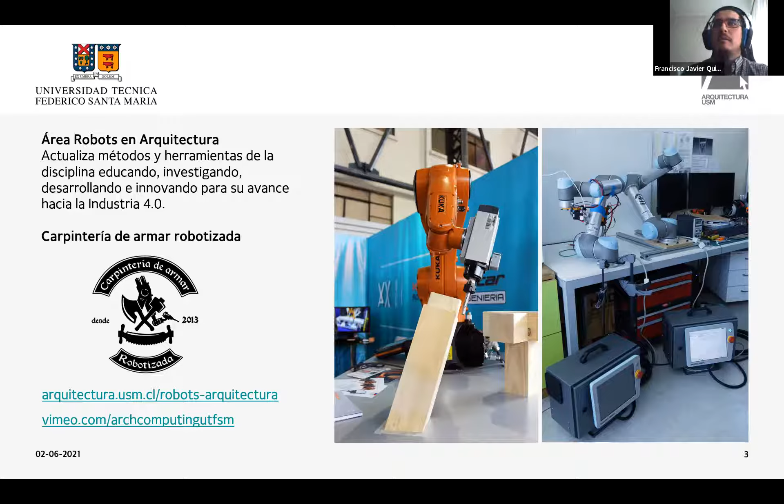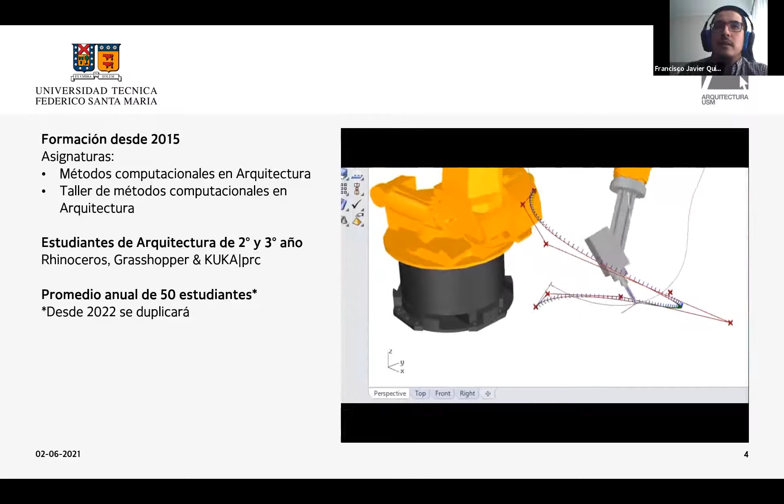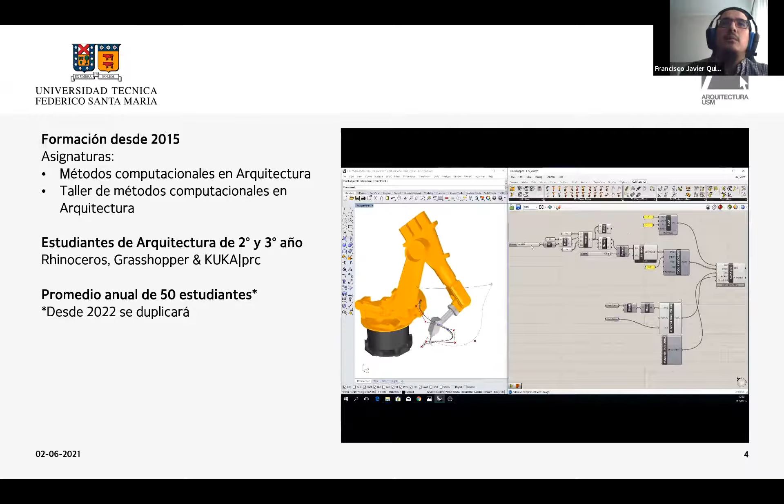Desde el año 2015 estamos formando arquitectos en estudiantes de arquitectura de segundo y tercer año, aplicando conocimientos de Rhinoceros, este modelador tridimensional muy popular en las carreras de diseño y arquitectura, implementando también la programación visual en Grasshopper, este ambiente de programación inserto dentro del modelador 3D.

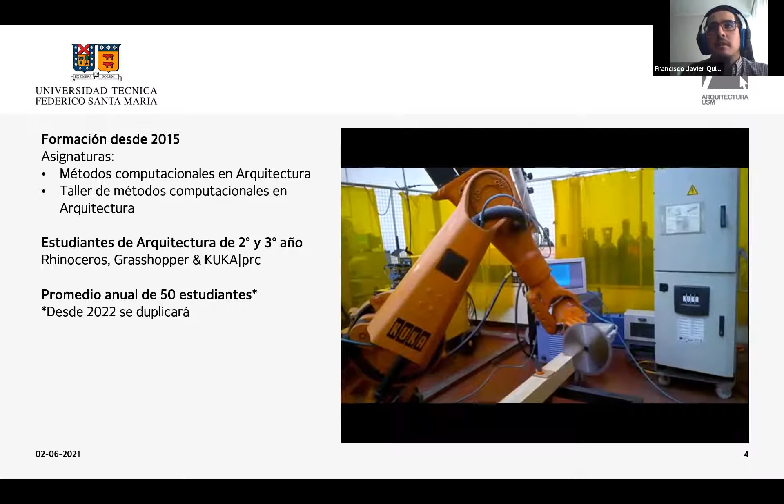Además trabajamos con el control paramétrico de robots KUKA con KUKA PRC, dando el crédito a Johannes Braumann, el arquitecto austriaco, desarrollador líder de esta aplicación, que permite controlar un robot manipulador desde este entorno gráfico.

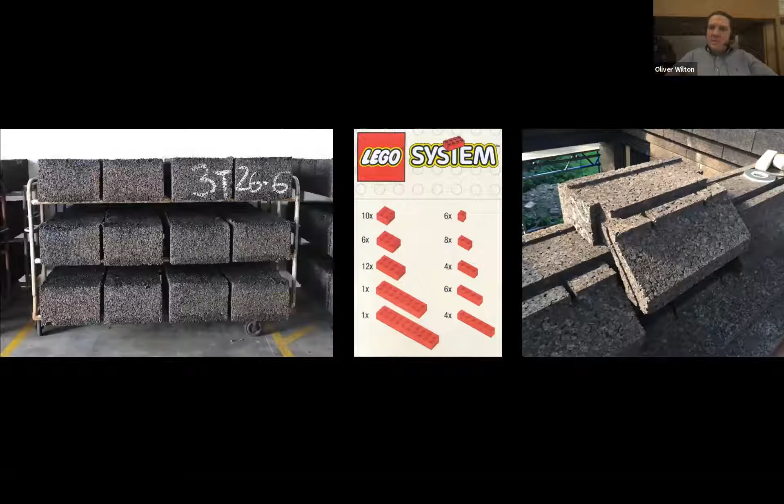So the aims for this specific work was to develop a robotic milling method that could shape cork billets, which you can see on the left, into the cork building blocks you can see on the right. And the idea was that this could contribute to the development of the cork construction kit, which is a relatively simple new form of construction, a bit like giant plant-based Lego. This was developed with a number of partners who were mentioned later under a broader research project and was then applied in Cork House.

Here's the context for this, which is very relevant here. So cork's the outer bark of the cork oak tree, stripped around once a decade in a process that doesn't harm the tree. And using cork helps to support these quite biodiverse agroforestry traditions that you find around the Mediterranean basin.

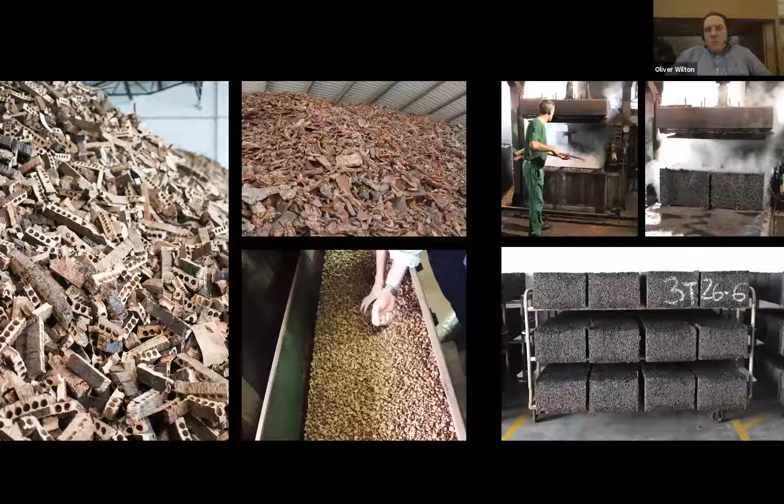The material we used in this project is pure expanded cork agglomerate. It's supplied by project partner Amorim. And here, waste cork from forestry and other industries is granulated and then steam cooked in autoclaves, which you can see happening on the slide. The cork expands, and the natural resin in the cork, called suberin, melts and then rebonds to form blocks of pure cork with no added ingredients. And that's what really attracted us to this, a kind of industrial plant-based product without petrochemical binders.

It was invented in 1891. It's not a new material. And it's been extensively used in construction for over 100 years, ranging from insulation, as you can see on the left here, in a Spanish slaughterhouse, to self-supporting partitions in the center in a large American cold store, to the first use as external cladding by architects Siza and Souto de Moura 20 years ago at the Hanover Expo.

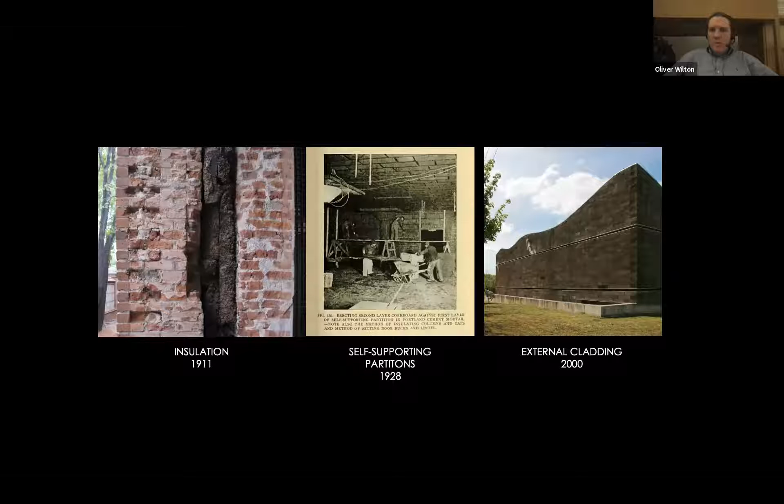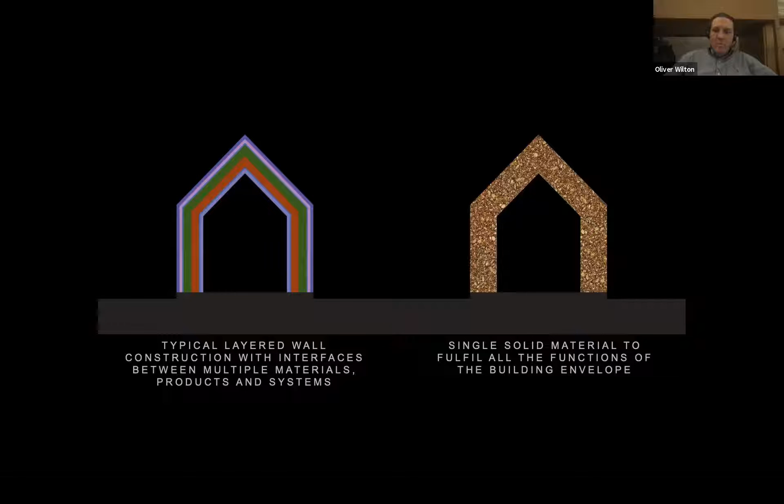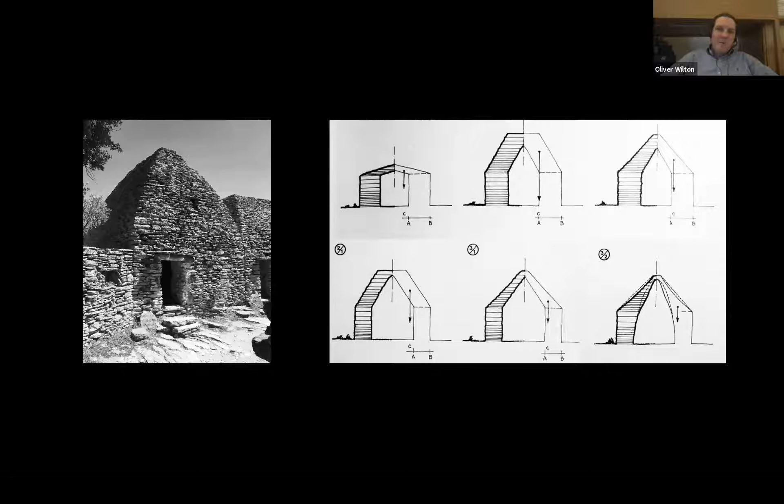And to complement the material simplicity, we intended to use a simple building technique. Our initial point of reference was historic forms of dry stone construction, such as this French borie, which are built by simply placing one block on top of another. And they come with associated typologies that reflect their character as simple compression structures, using walls and corbelled roofs to give enclosure. So we got started.

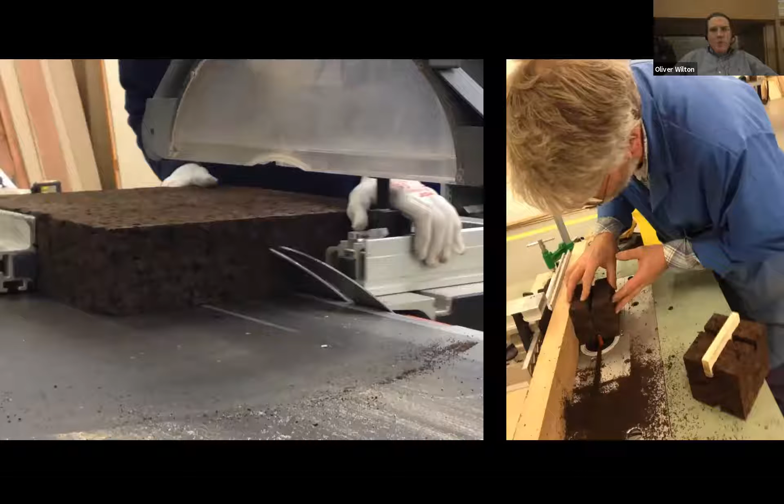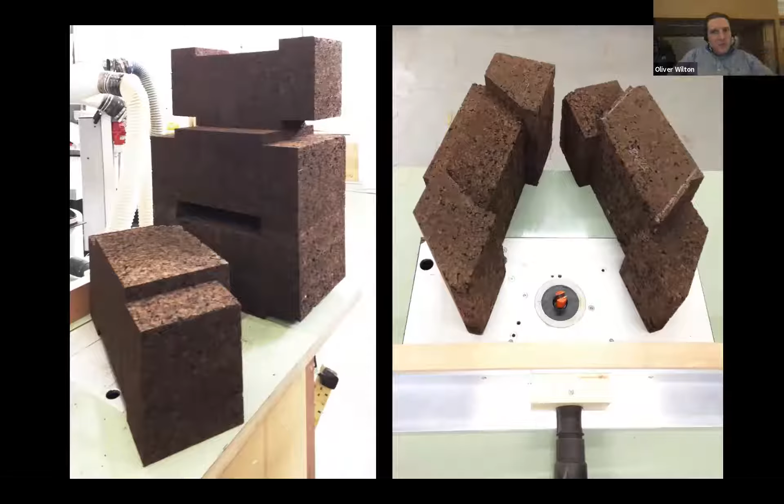Initial prototypes were fabricated using traditional machine tools. And we soon moved on to focusing on pure cork structures using tongue and groove geometries, you can see here, to give a simple interlocking fit that requires no glue or mortar. Soon we discovered that while there's a simplicity in asking one material to perform all the functions of a building envelope, the shape of the blocks themselves can become rather complicated, especially in the corbelled roof, which you can see on the right here. And this is because of what we were asking the blocks to do.

So as well as providing structure and needing an interlock for that, we also wanted them to keep the rain out and provide air tightness along with thermal insulation. Now, at this point, analog fabrication was proving to be quite challenging due to the time taken to shape each block. And it was also difficult to achieve sufficiently low tolerances in order to give a snug block-to-block interference fit.

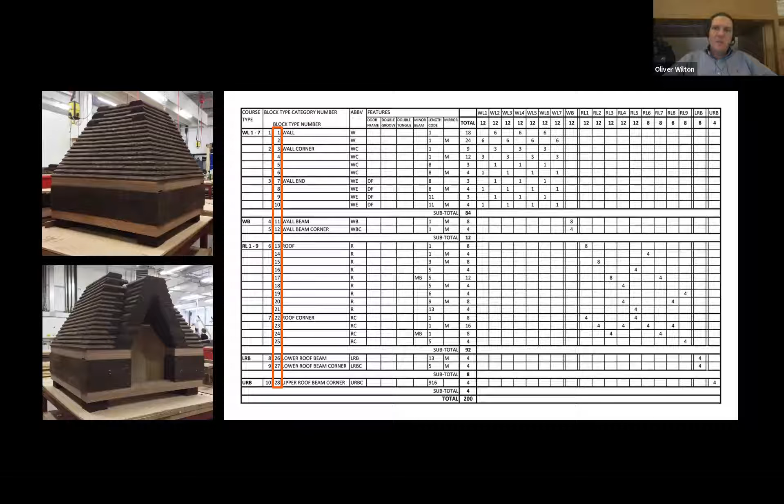And the simple prototype cabin that we intended to build had around 200 blocks, and that included 10 unique types of varying length, giving 28 different block geometries in total. So we started to consider using robotic milling with the aim of being able to fabricate blocks sufficiently accurately and relatively quickly. And we were lucky to be based at the Bartlett with colleagues from B-made and people like Mike Arnott around who knew what they were doing on this.

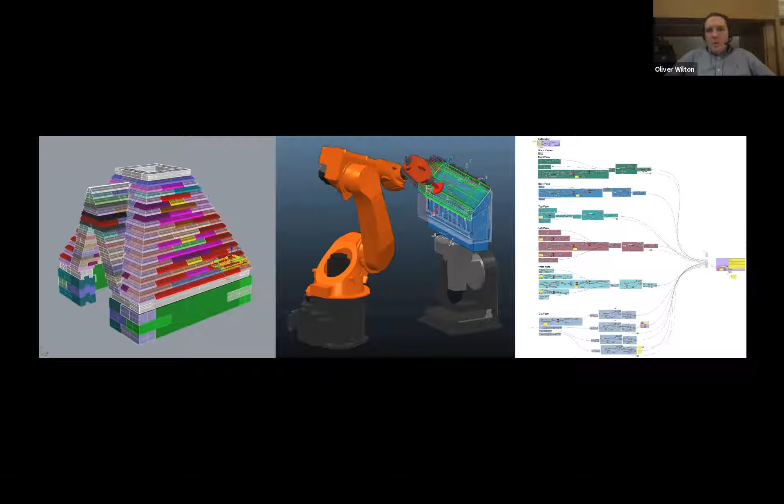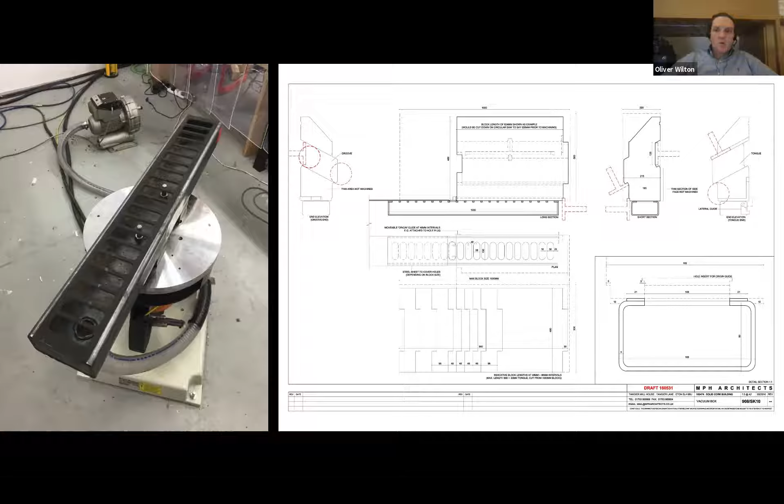Now we determined to use a single 125 by 40 millimeter high volume cutter because we didn't have access to a tool auto changer. We wanted it to be a quick and efficient process. So to enable this, we adjusted the block geometry, which you can see on the right here, so that the face was used for high volume cutting, and then the edge was used for putting in slots, which gave performance relating to rainwater drainage and air pressure equalization.

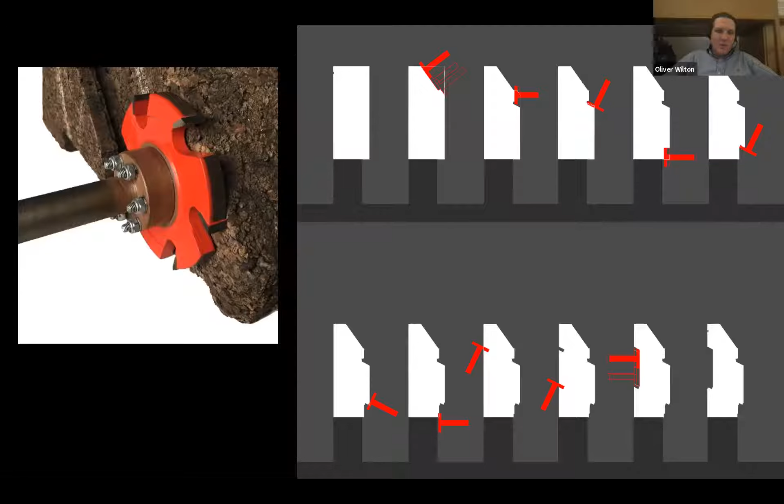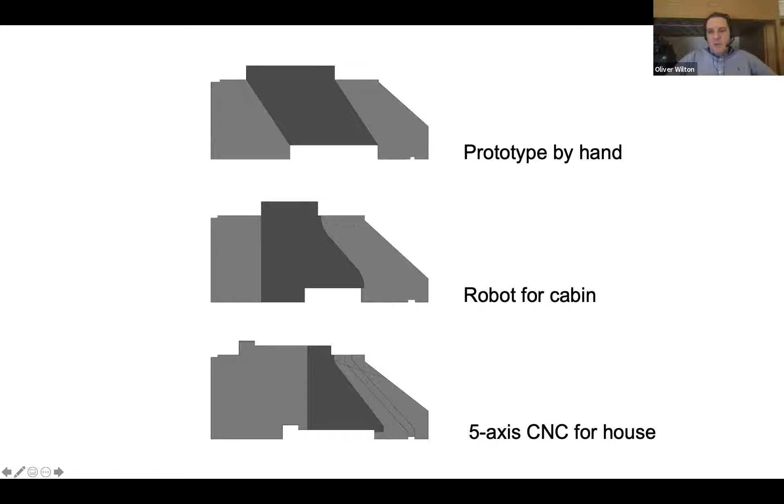So you can see how the profile for the roof block evolved. So the top were the initial by hand versions. The one in the middle is the robot milled block used for the cabin, and the one at the bottom is a slightly more elaborate geometry that we ended up using for the house after we learned some lessons along the way. And so here's after a lot of work, mostly by Matthew and Mike Arnott, this is a robot cutting a roof block.

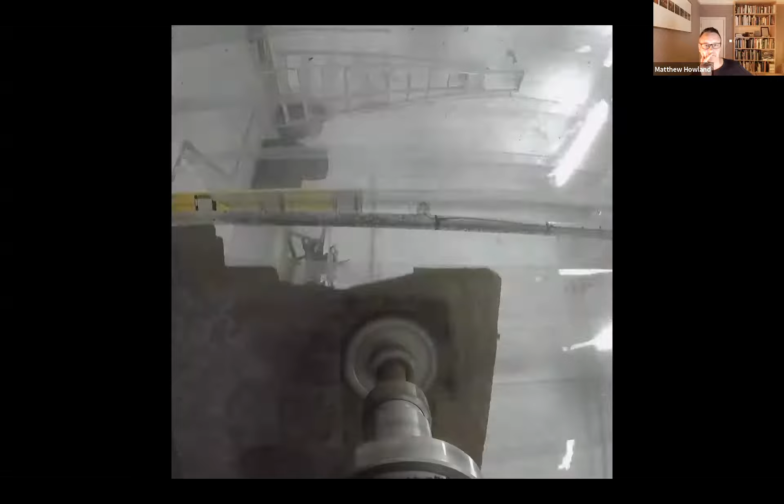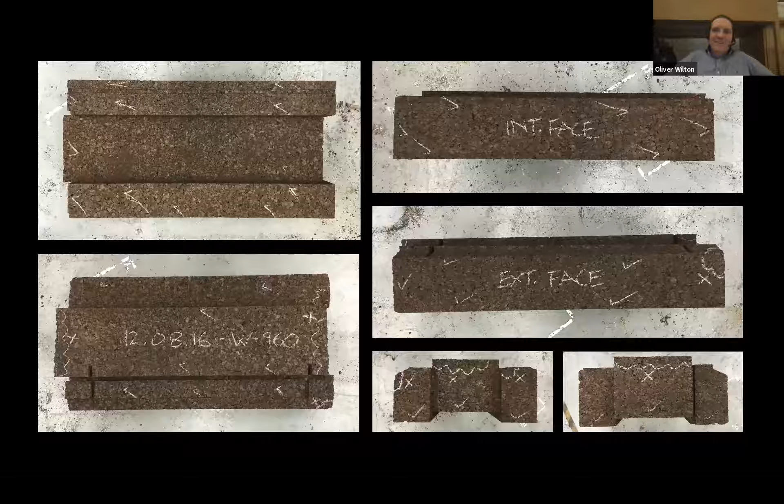So when that was working well, that would take around 15 minutes or 20 minutes per block to cut. And there was quite a bit of work on robot calibration and adjusting the cutter speeds before we started getting blocks of sufficient tolerance. And again, that was work that Mike Arnott was heavily involved in with Matthew. They really bore the brunt of that work. It wasn't quite as simple as we'd initially hoped it would be, but it did work very well in the end after quite a long time.

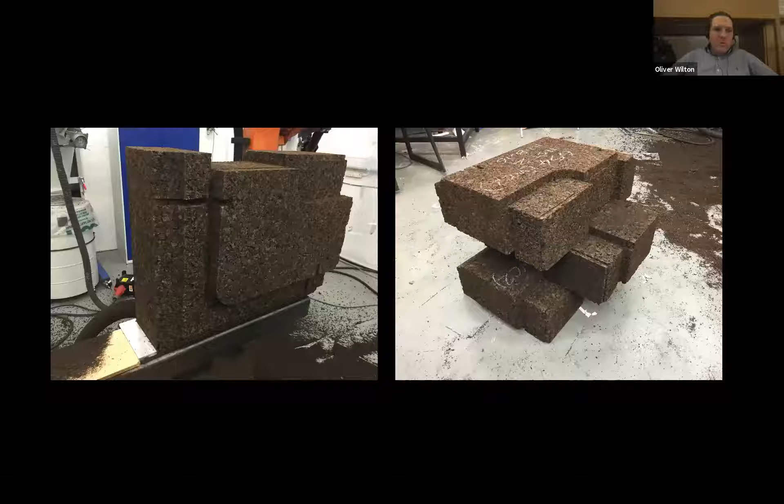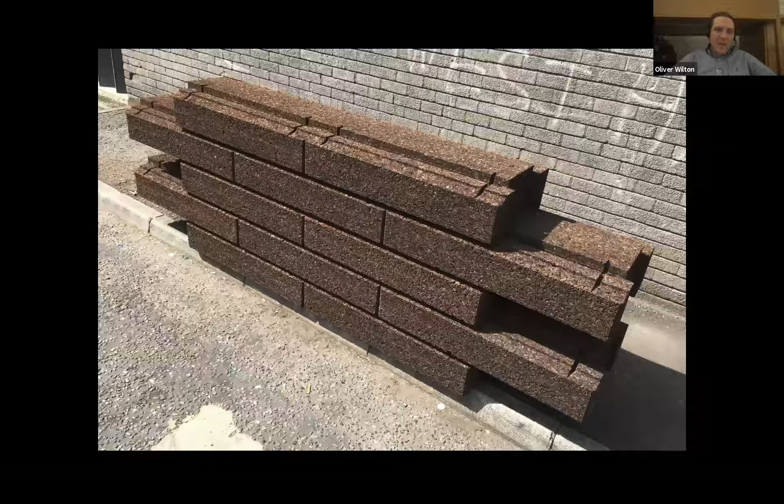So here you can see some wall corner blocks, a block on the left on the cutting vacuum bed, and on the right assembled. And here you can see the first section of wall that we assembled at the Bartlett, and that was an exciting moment because it was at that point that we realized that we could actually proceed with this method and it might actually work.

So anyway, something we discovered, and particularly Matthew discovered, was that it wasn't such a clean process as we'd initially assumed. So we thought, cork, robotic milling, it'll all be beautifully accurate and clean, but it wasn't quite like that. For some blocks, around 20% of their volume was cut away during milling, and this gave an awful lot of cork dust and granules.

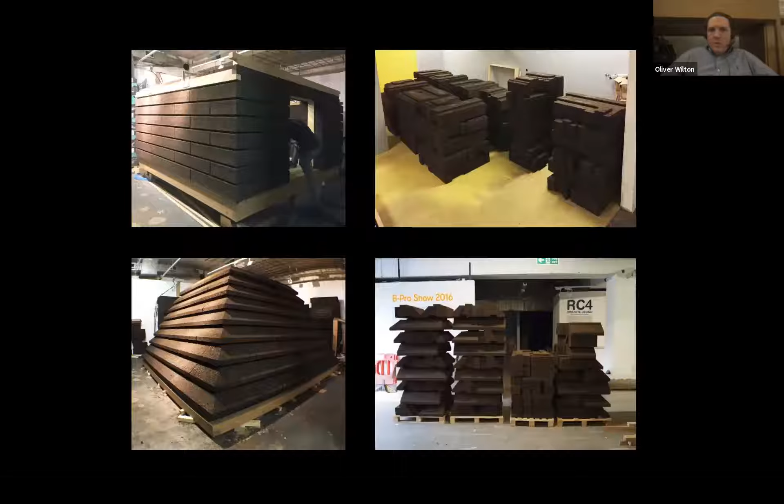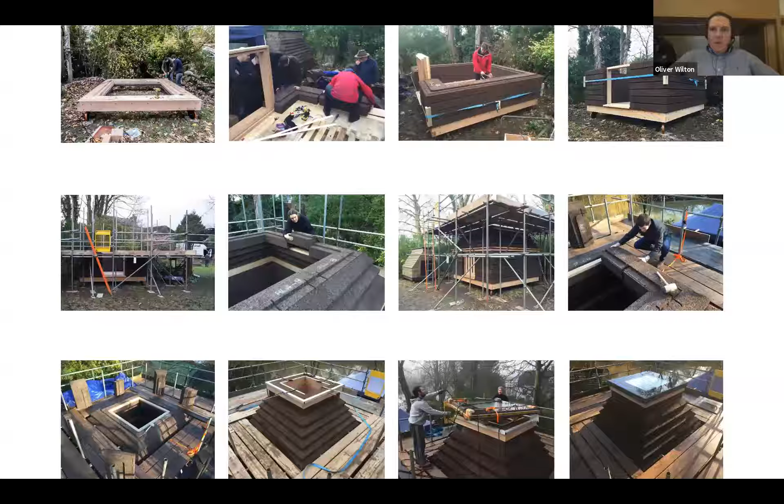So moving on to contribution to the broader research. So we've looked at the use of robotics. What did that do for us more broadly? So we used the robotic milling method to shape all of the blocks for the cabin prototype. And you can see here that they were assembled at UCL to make sure they fitted together properly before being taken apart and then transported to site for reassembly. So you can see the cabin being assembled here. Relatively simple assembly by hand on site with no glue or mortar used.

So there's timber with a CLT floor platform, cork walls and roof, and a roof light on top that brings light in and helps to weigh the structure down and stop it blowing away. It's relatively clean and simple to build, and a full-size cork block weighs around 13 kilograms, so fairly easy to handle.

Here's the cork cabin in its initial form. We used it as a test building, and we learned a few lessons and modified the system as a result of that testing. And this, along with a range of in-depth lab tests, enabled us to develop and de-risk the system to the point where it was ready to use, and Matthew and Dido were happy to use it in the cork house.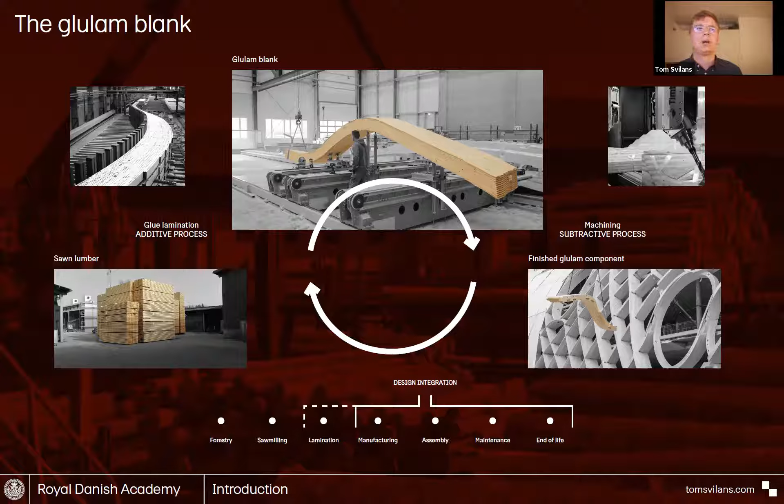On the one side being an additive process of glue lamination, and on the other hand being a subtractive process of machining. So how to expand that space of design into earlier processes, such as lamination and what happens in manufacturing, and also bring that knowledge forward into the design process to make it more accessible to architects.

So between CITA, White, and Blumer Lehmann, it developed into a three-part project about how do we model these processes and materials. How do we start to encode these in the tools we use to draw and create models and information? How do we materialize these objects? What are the processes and new takes we can integrate into the actual materialization of glulams and complex timber forms? And then finally, how is all of this implemented into design practice, or how can it be leveraged in a multidisciplinary architectural practice setting?

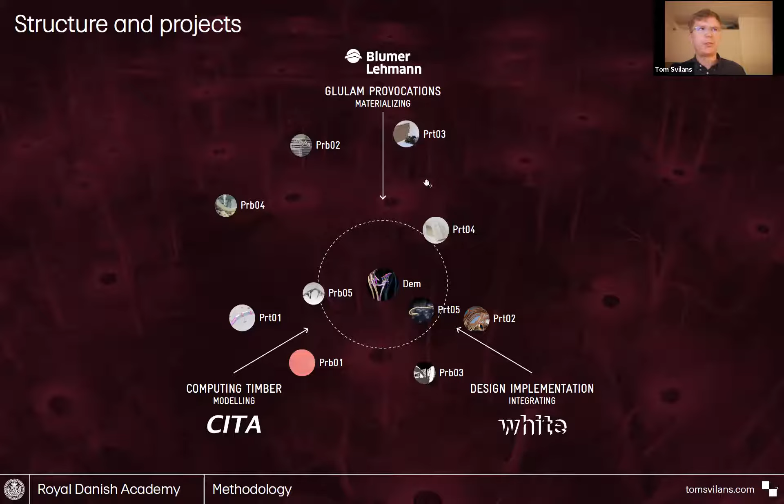And within that, there was a variety of sub-projects and experiments, just a few of which I'll gloss over here.

When it comes to modeling, the PhD developed a series of software tools, workflows, and methods for encoding a lot of the material behavior and material properties, or glulam-specific properties, into digital models. This was trying to add a sense of glulam materiality early in the design process, to give architects something very early on to indicate downstream complexity and difficulties.

Along with that, there's the question of what happens at the material level. How can we encode properties such as fiber direction and different wood properties at an element level and at a material level? And then how does that propagate through the design and more meso and macro scale considerations?

And then on the materializing side of things, it was very much about, well, now that we have the potential for these very unique and bespoke forms that are tailored towards particular design objectives or performances, how do we actually deal with them on a material level?

This led to a series of experiments where, with Blumer Lehmann, we integrated a series of scanning methods into their factory and into their process, to look at how we can introduce, in the spirit of Industry 4.0, how we start to merge the space of the model with the physical production.

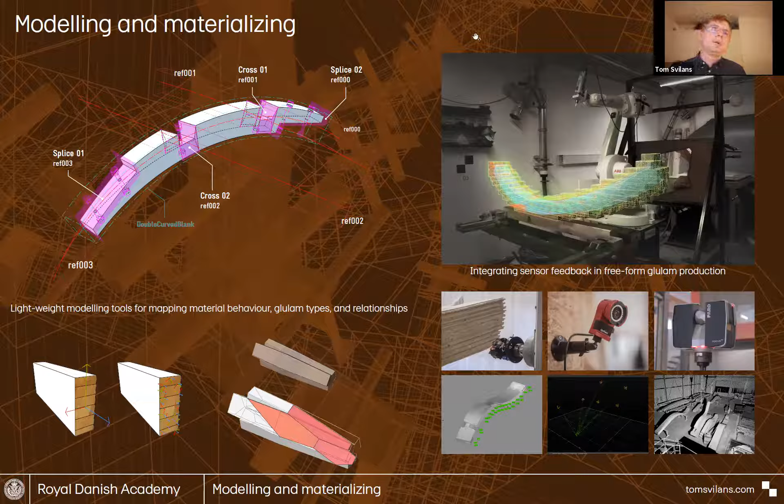And then as a way of developing a design practice, these tools and methods were tested in a design context. So how can we actually start to use these for design, for competition projects, for development projects at White, for example.

So given a highly complex structure with several hundreds of pieces, how can the complexity of information be managed from the level of the overall design down to all the details, and how can we develop a feedback link between the constraints and limitations at the element level, the bending limits of the wood, the material requirements of each glulam blank, the machining constraints, as we saw from robot limits and all these kinds of things, and how can we relate that to the larger model.

In the beginning, this was proposed to be a simple concrete footpath bridge. Part of the work with White was to build a strong case for changing that into a timber bridge, and to convince the client, the stakeholders, and the rest of the project teams at White that this is a good idea.

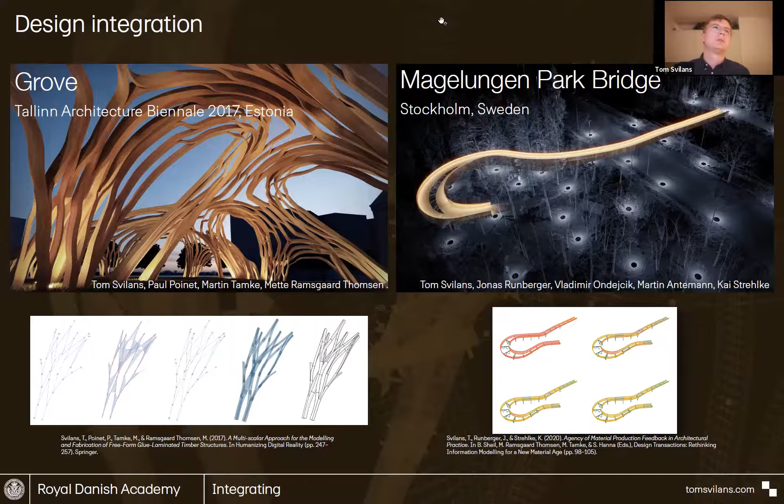The final demonstration of the PhD project was taking the process from end to end - from the digital design of a variant of the bridge project to a small component of it, taking it through to production and an exhibition, integrating the sensing methods we worked on at Blumer Lehmann, integrating it with generation of fabrication data, alignment on the machine, and final execution. So that's what that resulted in.

What the PhD develops is this notion of a material practice, or a digitally augmented material practice around freeform timber. So what are all these? On the one hand, you have all the digital software workflows. On the other hand, you have the physical manufacturing constraints and considerations, and necessary knowledge, and how can we merge that into a design practice that engages deeply with these issues.

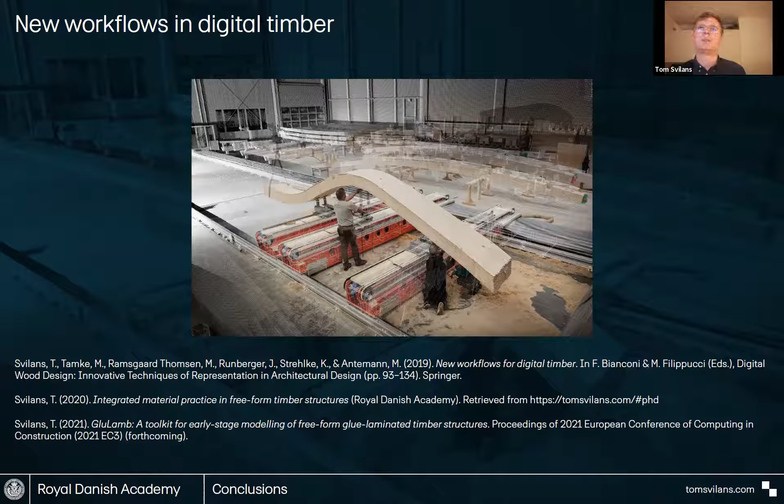And it proposes this digital timber continuum, which is a play on Branko Kolarevic's notion of the digital continuum, which is between design and machine. Now if we add in that element of material properties and material behaviors, then it becomes specific to digital timber.

And then just to briefly talk about some ongoing research. The PhD looked at the value chain between lamination and the manufacturing and assembly of glulam elements. And then the question was, what if we extend that integration further back in the value chain, back to sawmilling and forestry?

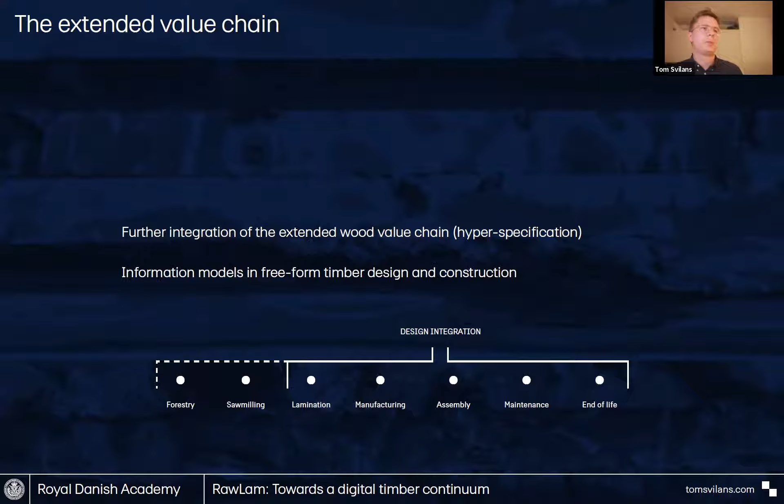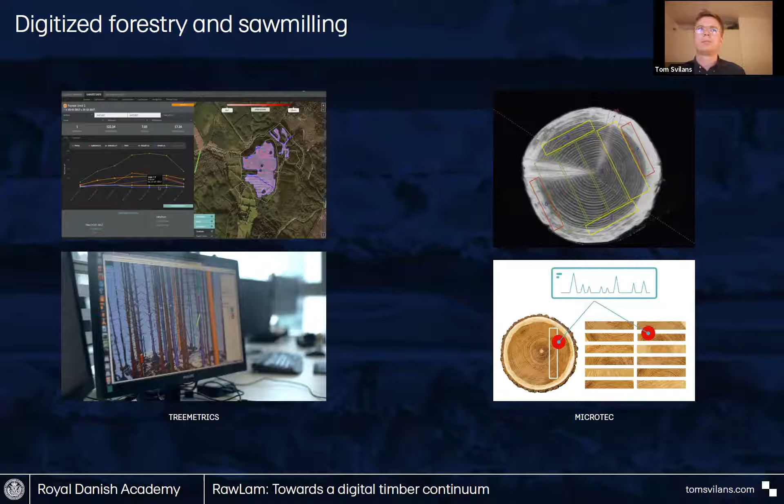And on the right is a company called Microtec, which specializes in CT scanning timber logs at sawmills as a way to maximize the value yield of logs and optimize material exploitation from harvesting. These were interesting to us because they exist, but they're largely untapped in design. So there's all this information on the other side of the value chain which, with some design integration and new workflows, we believe we can start to leverage in design.

So this RawLam project came of that - how can we deploy these new technologies into developing hyper-specified laminated elements.

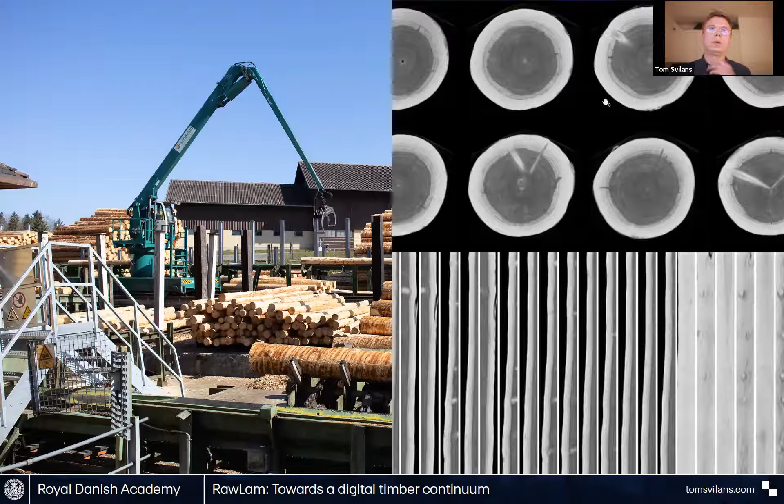And this first prototype explored this. So given some basic performance demands like the quality of wood around a joint, the outer flanges of a beam, the amount of curvature in a certain glulam element, we could start to allocate notions of material quality against notions of performance demands.

By mapping the data from the log, or mapping precise parts of the log onto precise parts of the element, we can achieve a more thorough exploitation of the material. It's not just about extracting more high value product, it's about using lower quality product where it can be used more precisely, trying to nudge the needle a little bit in how we exploit timber in industry.

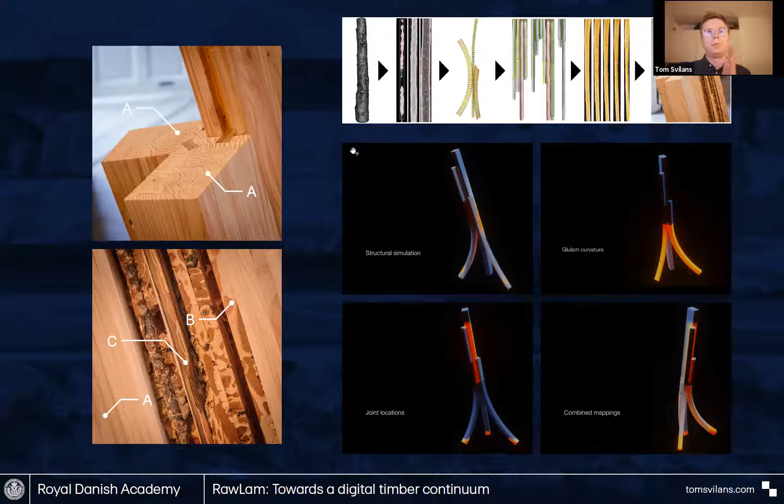But it also leads to very beautiful representations of intersecting digital geometry with the digital log, and what that reveals about the interior of the log, and how we can start to map that onto our digital modeling tools. Becomes very interesting. On the left is some playing around with the model, extracting little fragments and seeing all the knots, seeing all the data that's inside.

But of course, the challenge is in how do you track the wood from the forest all the way through to the construction site, bearing in mind that there are different timescales involved, different technologies, different stakeholders, and it becomes a very elaborate network of actors.

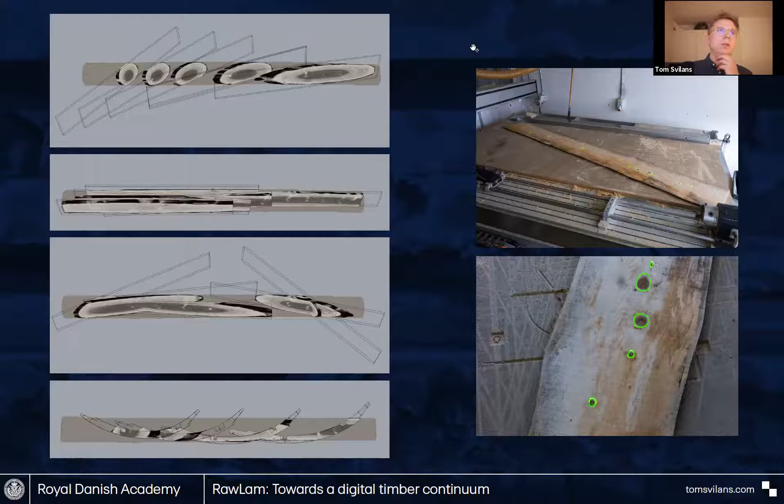But this is kind of where it's at. We're still developing this with MiCROTEC and with Tree Metrics and with some other partners. We're building up partnerships in Sweden with the forestry industry there, who also have a very urgent need for new ways of thinking about how they are exploiting forests. I think it's not only a Danish or a Swedish concern, it's a concern across the world about how we use our forests, and we need better ways to do that.

So that's it for me for now.

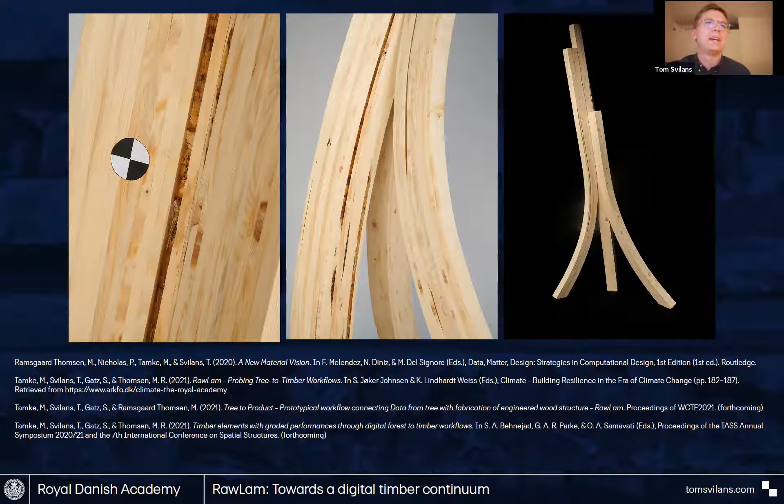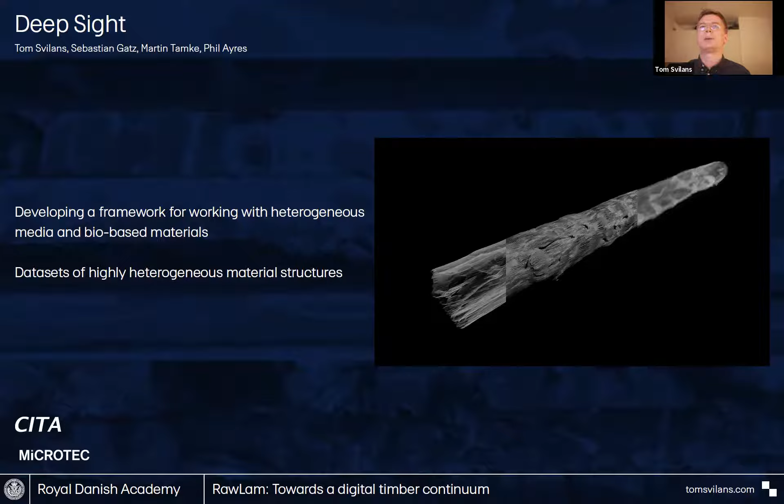Just one sub-project of the RawLam project was Deep Sight, which was building up a computational framework for working with volumetric data. Now that we have models that aren't only about describing surfaces of objects, but actually describe the interior media of objects, we also need to change the way we think about stuff. This is also tapping into other research projects at CITA, which look at other biomaterials, such as bio-based 3D printing and grown materials like mycelium and mycelium composites. This framework asks how do we actually understand material just beyond the surface. If we are broadly shifting towards a more bio-based economy of construction, we need new tools and new conceptions of how we model, represent, and utilize these very complex material assemblies.

So I'll leave you off with that. Thank you very much again for inviting me.

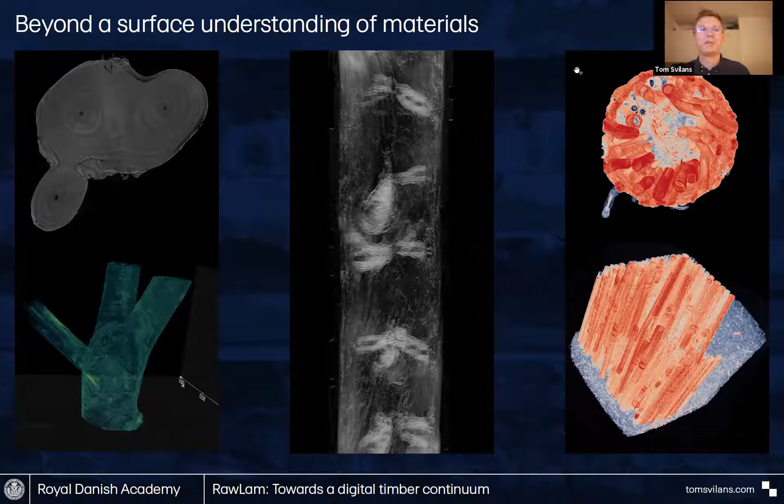Thank you, Tom. Thank you very much. Very, very interesting. Great. Well, I think we have enough time for the round of questions.